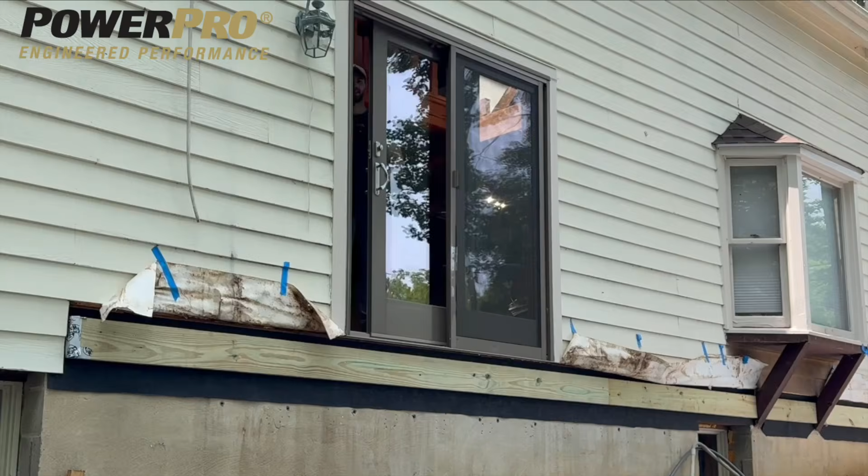In today's episode, we're gonna frame a deck.

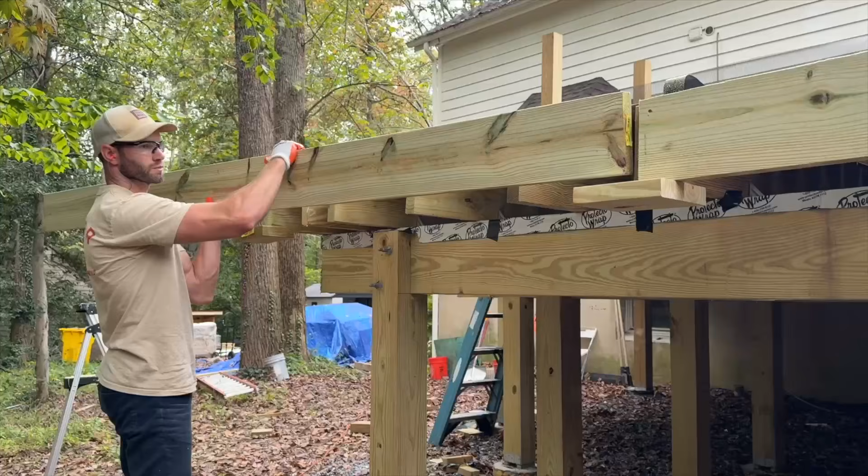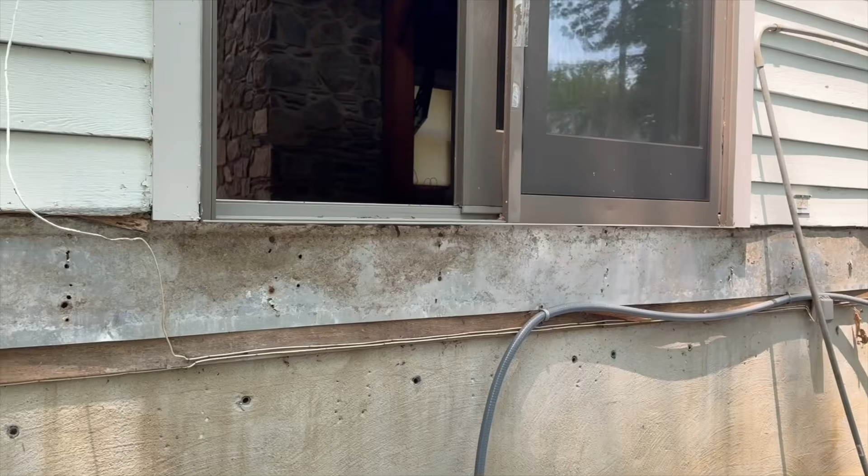Let's get this deck framing party started with the ledger board. The ledger board attaches to the house right here, and it's one of the most important parts of any deck. But if the ledger board is not flashed correctly, you can have a ton of rot and water damage, so I was pretty terrified to see what I would find behind this existing flashing.

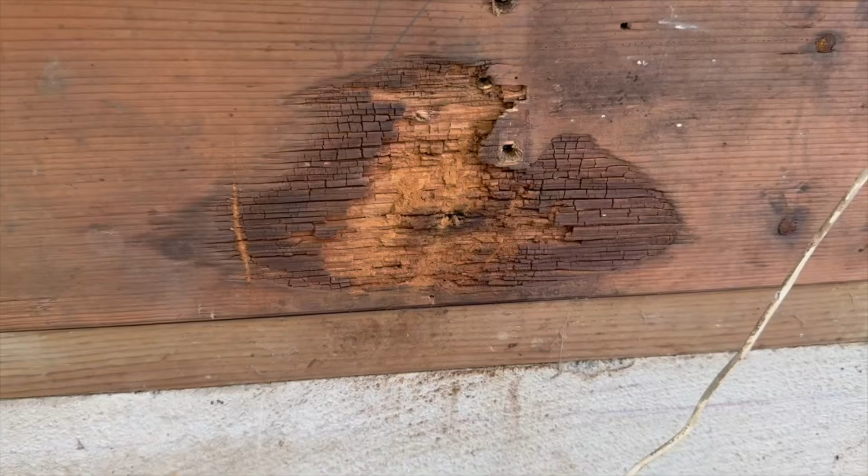So here's how we look with the existing flashing removed. Honestly, not too bad. There's a few areas like here and here with a little bit of rotting, but honestly, better than I expected. So the first step in getting a new ledger board mounted is I want to apply waterproofing to the rim joist on the house.

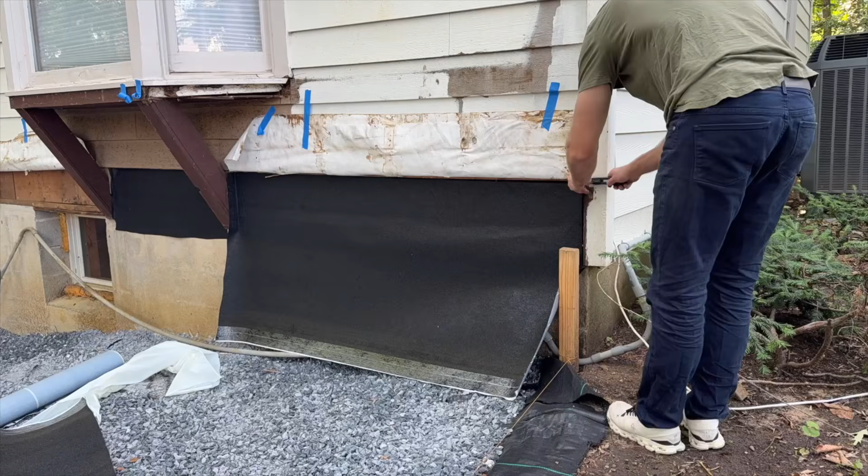I'm using a waterproof ice and water shield that I had left over from a previous project, but really any waterproof membrane will work. I like to leave the flashing long and then I'll come back later on and cut it with a utility knife. But you're gonna run this all along the rim joist and do everything you can to protect as much of your house as possible. And going back to that existing metal flashing, I wanna address a pet peeve of mine.

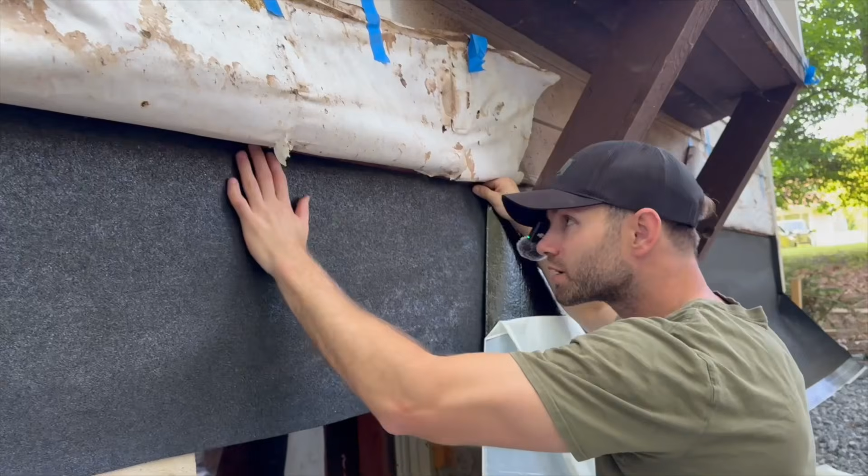I feel like everyone is very quick to judge the work that was done before them, saying it was wrong and it was improper, yada, yada, yada. You guys know the saying that yesterday's state of the art is today's butchery. So that flashing probably was exactly what people were doing at the time, and it seemed to work okay.

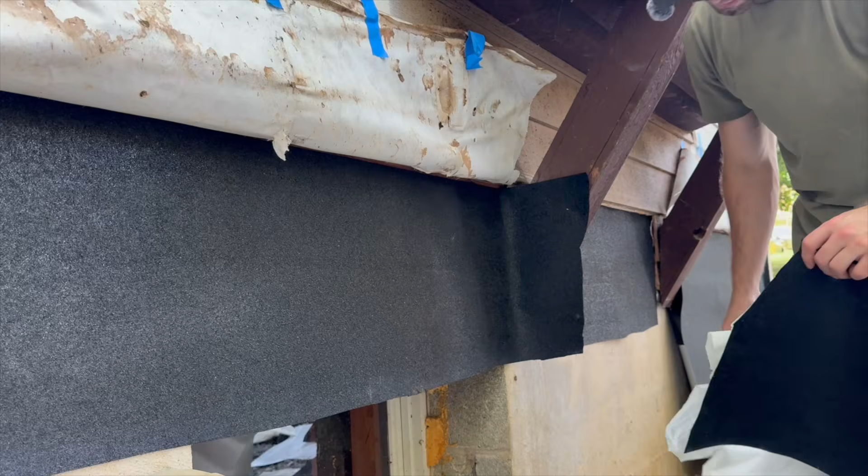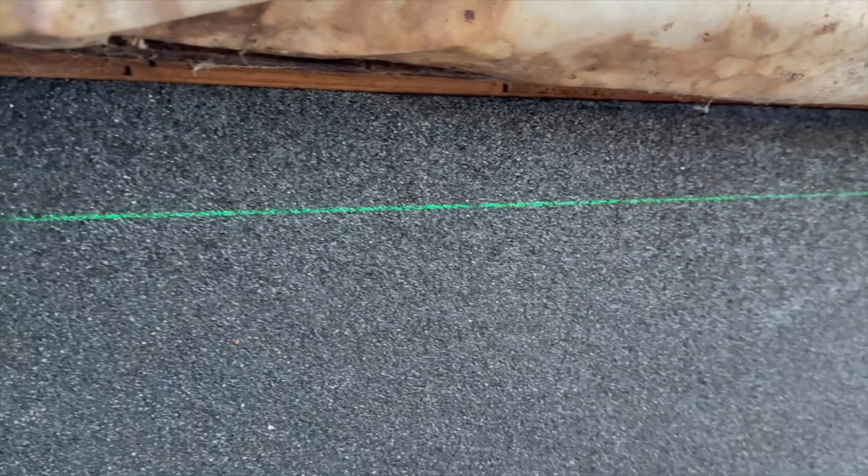To set the mounting height for my ledger board, I like to use a laser level to get that projection level across the flashing. I like to set my ledger board about 3 inches below the door threshold because I want to have 1 inch for the decking and then maybe 2 inches so water doesn't end up making its way into my house under a heavy rain. And you always want to snap a chalk line on top of the laser level because that laser level is going to run out of batteries or die or just be hard to see.

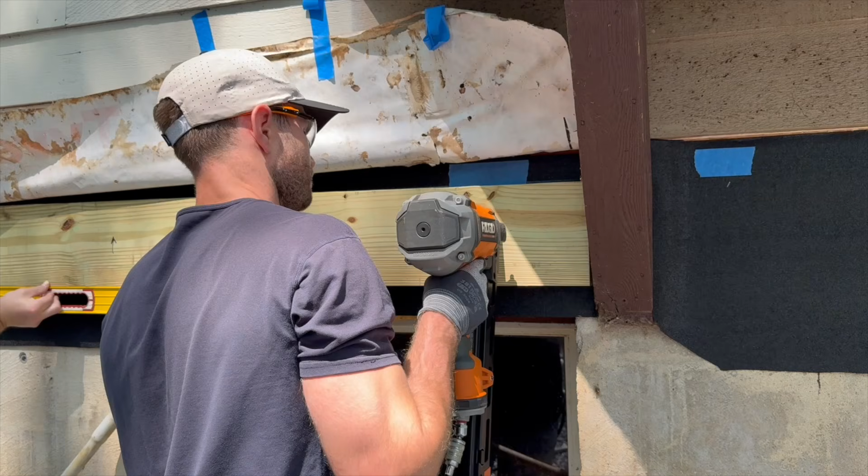Your ledger board is typically going to be a 2x8 or 2x10 piece of pressure treated lumber, and you want to make sure that you crown all of your lumber before you install it. I'll talk more about that later. I like to position the ledger board on my level line and then tack it in place with some 3-inch framing nails. Having a second set of hands really helps when setting your ledger board, and don't worry, we're going to go back with some heavy duty fasteners later on. These nails are just to hold it in place temporarily.

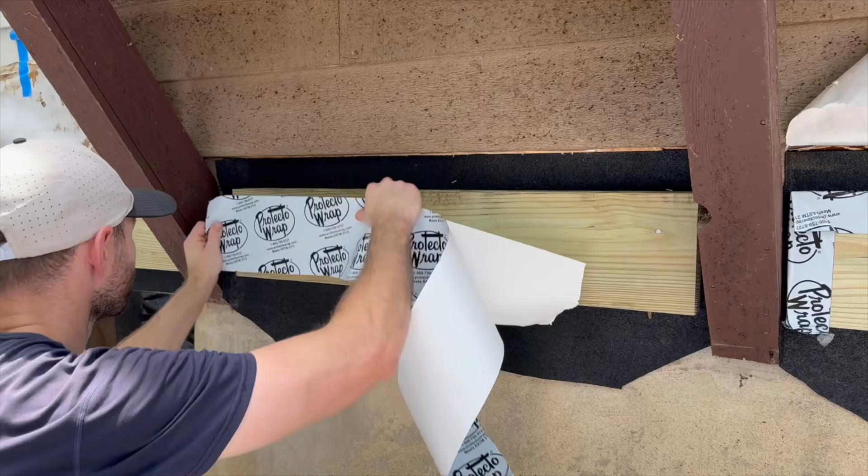And I feel like everybody sets their ledger board a little bit different. This is just how I do it. And speaking of which, I apply a piece of 6-inch flashing on top of the ledger board just like this. My idea is that we're not going to have water getting behind the ledger board if we install this flashing now.

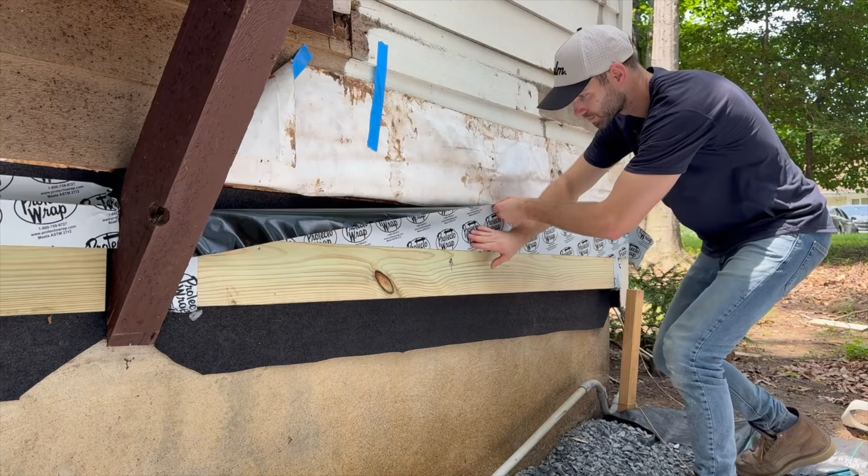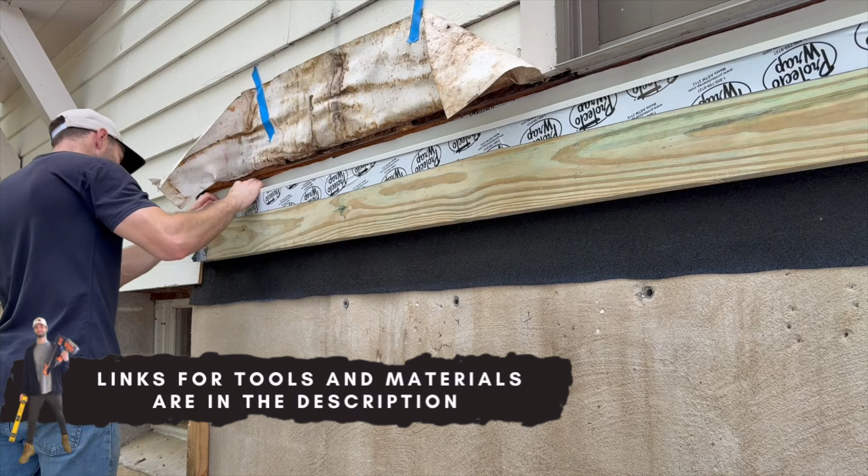Now, some people will argue that this is incredibly redundant because I'm going to go back after applying this flashing and I'm going to install a piece of metal or vinyl ledger flashing right on top of it. So some would argue this is unnecessary, but this is kind of the belt and suspenders approach that I've used for the past decks I've built. So let me know if you think this is overkill or what you do for your deck. I don't know, I just feel like I'd rather be safe than sorry. I like to nail either the metal or the vinyl flashing to the house every 18 to 24 inches or so.

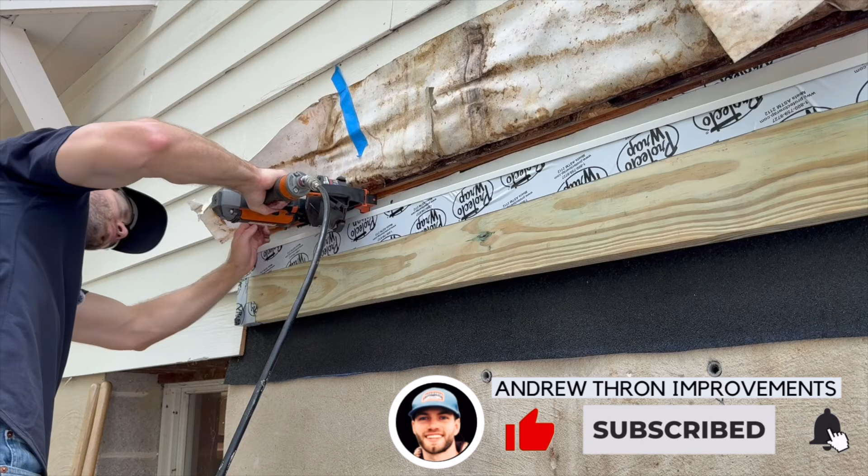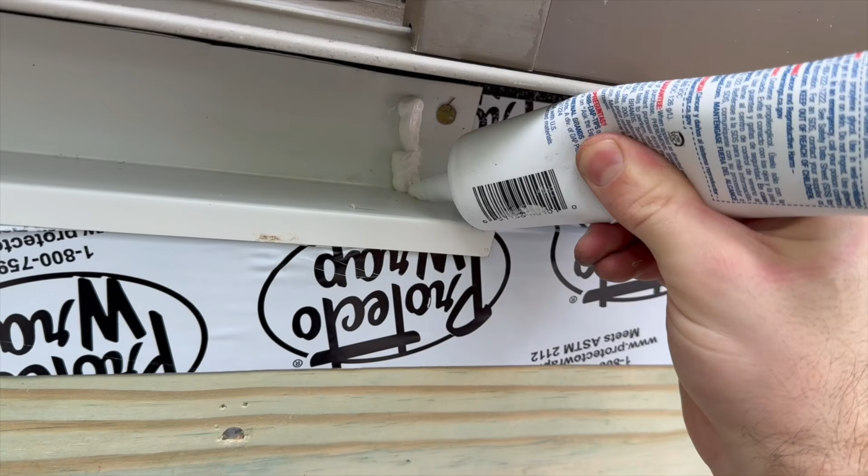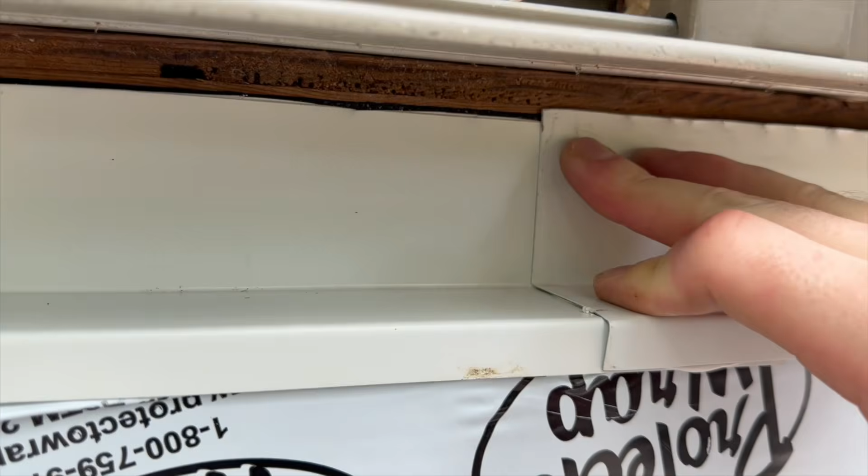And I wish I had vinyl flashing, but they only had metal available at my local hardware store. And if your deck is going to be longer than 8 feet, chances are you're going to have to overlap some of your ledger flashing. And for this, you want to apply some caulk to one end and then overlap it by about 4 inches. The logic here is that if any water makes its way on that ledger flashing, it won't be able to go underneath because of the caulking you put in place. And don't forget to nail the overlap. I'm using a roofing nailer for this, but a hammer and a nail will work just fine.

And if you find yourself thinking, wow, must be nice to have a roofing nailer or all these tools, just know that they all have a story and a terrible project behind them because roofing is not fun, especially in 90-degree heat.

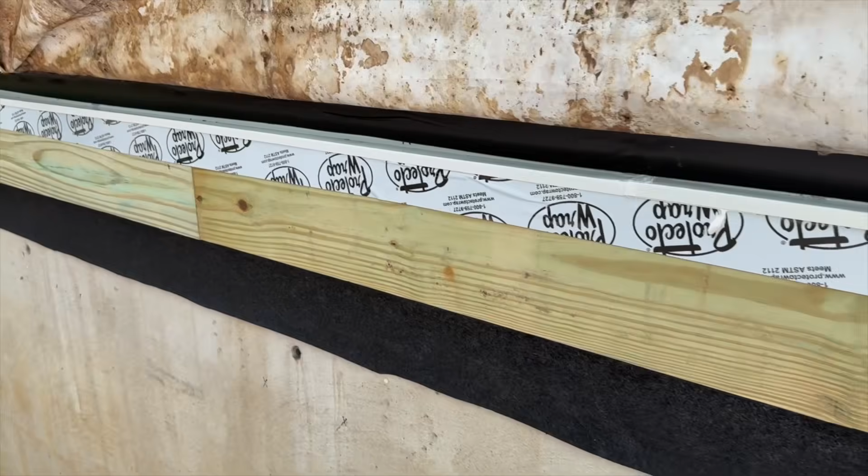I use tin snips to make any cuts or adjustments to this metal flashing. Again, I would go with vinyl if you can find it, and that way you can just use a utility knife or some regular scissors to cut it, but it's really not too bad either way. And you might be thinking, oh no, now you got the nail holes for water penetration. Well, here comes the last layer of waterproofing, which is a piece of joist tape that goes on top of all those nails. So at this point, if you're keeping track, we have the belt, the suspenders, and a couple safety pins. Our pants are not falling, and hopefully our deck is not rotting.

Now, to actually secure that ledger board to the house permanently, I'm using some LedgerTite Screws 3 5/8 by Power Pro, and I'm going to put these every 12 inches or so. The actual requirements for your ledger screws in terms of size and spacing is in your building code, so make sure you consult that. And these LedgerTite structural screws require no pre-drilling, and they install 30% faster than many of the other screws on the market.

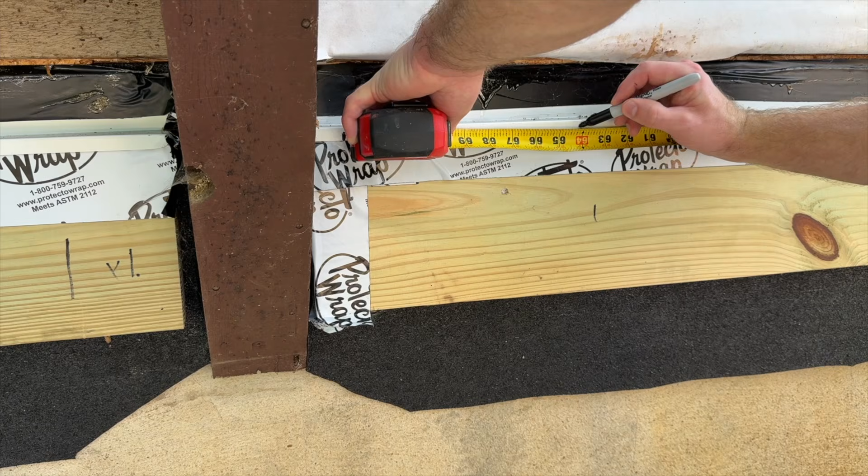And the last thing you want is for one of your ledger screws to get in the way of your joist. So it's a great idea to mark your either 16-inch or 12-inch on center joist spacing before you put these screws in to ensure that you don't have a conflict. I'm doing 16-inch on-center joist spacing, which we'll talk about later, so I just did 2 screws between each joist bay. And I like to stagger them one high, one low. One thing I do want to mention is that some people are getting away from ledger boards and instead they're installing a second beam right up next to the house, but we're going with the old school ledger board for this deck. With the ledger board installed, let's talk about the posts and beams.

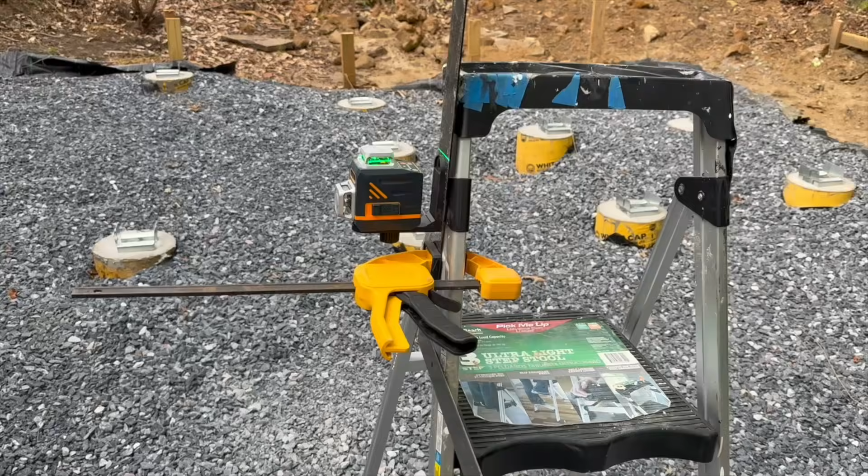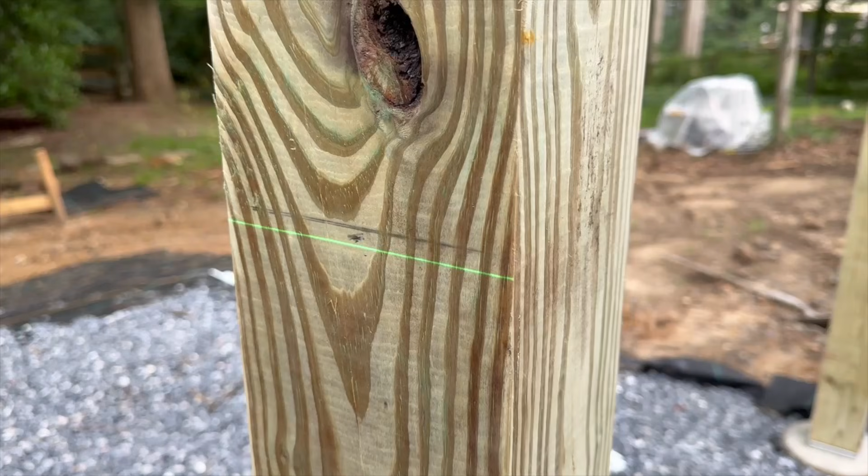In order to get the height for the posts, I like to use a laser level to project a line along the bottom of the ledger board here. Since we're using 2x8 joists, the bottom of the joist will be at the bottom of the ledger board. To mark the cut line on the 6x6 we're using for posts, I stand them up in the post hardware and then I mark the laser line where it intersects with that post. Make sure that your post is all the way at the bottom of the hardware and that you use a post level to make sure that it's perfectly plumb before you make your mark.

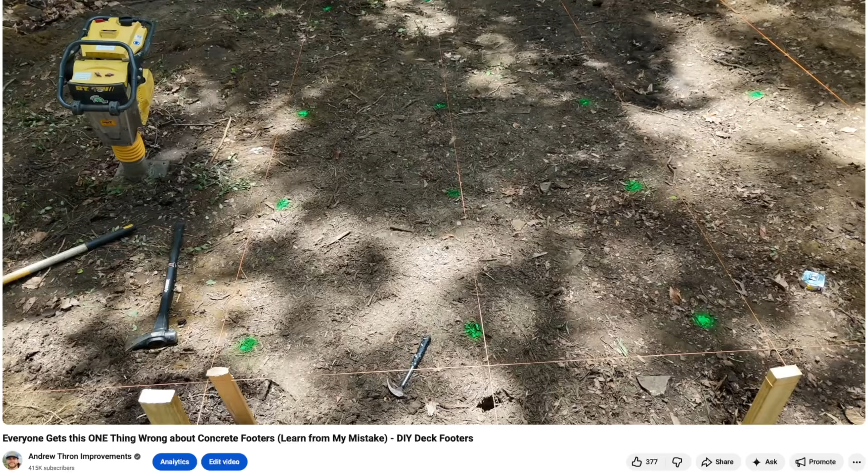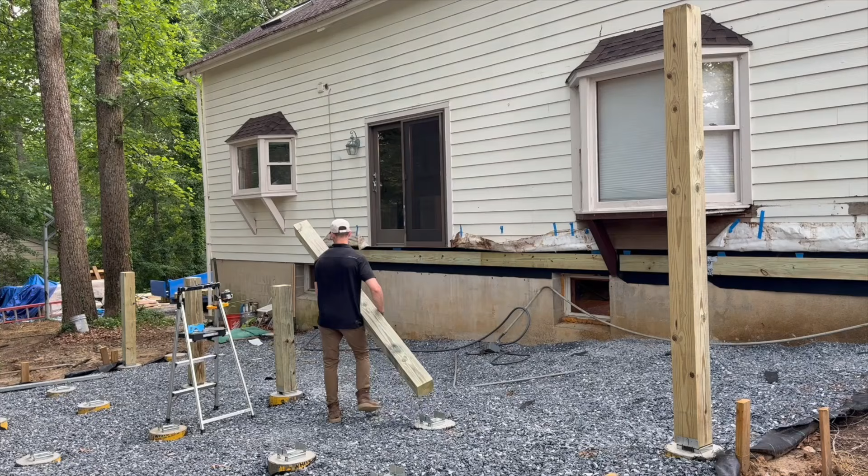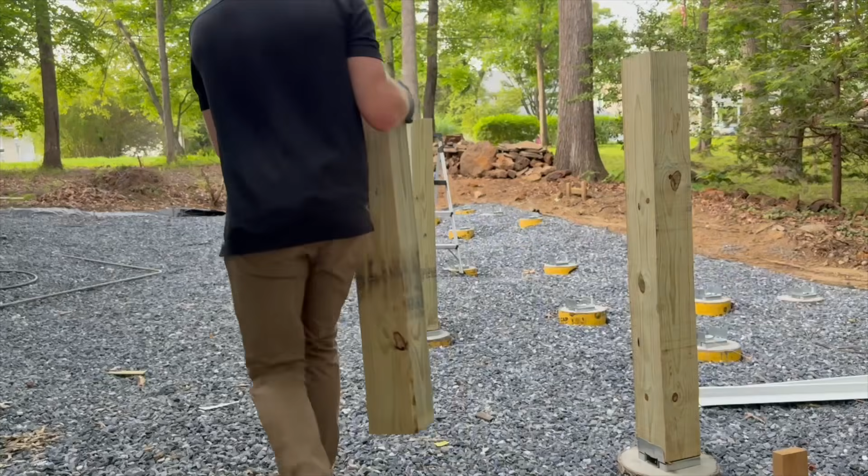Using the 10-foot long 6x6s was a little bit unruly, so feel free to trim them down a little bit before you put them in the hardware, but I just kept them long and muscled my way through it. To cut the 6x6s, I just used a miter saw, and the annoying thing about a 6x6 is usually you're gonna have to cut one side and then flip it over and cut the other. A little bit annoying, but you'll get through it. And for my last deck, I used 4x4 posts. I just felt like for this deck and what it's gonna be supporting, a 6x6 was the right call.

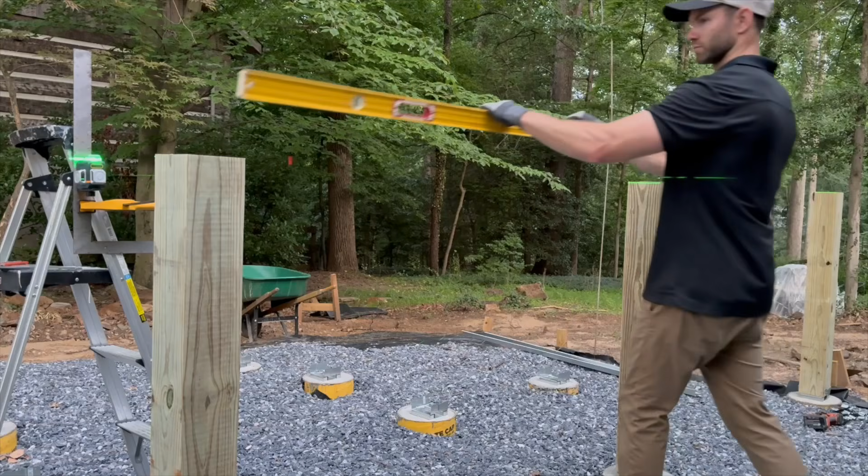So a little bit heavier, a little bit more expensive, but I think I'll sleep better at night. And if you're paranoid that your laser level is not calibrated or something, you can double check everything with a 6-foot level, but you should be in good shape.

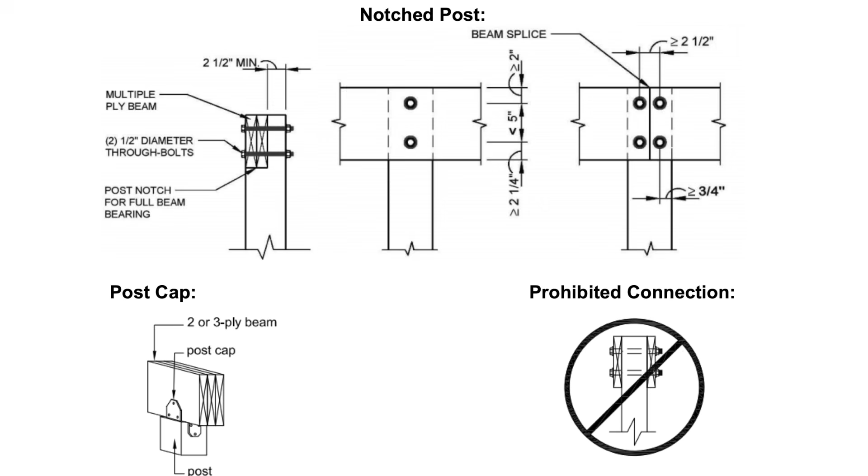When it comes to installing the beam, code prohibits any kind of side mounting to the post. I've seen plenty of decks with this type of beam and it puts all of the stress on the hardware and none on the post. No bueno. Option number 2 is to mount the beams directly on top of the post with a piece of hardware. But I think we can do better with the third option, which is to notch the post. I have a 2x10 beam, so we're gonna cut the notch for that right now.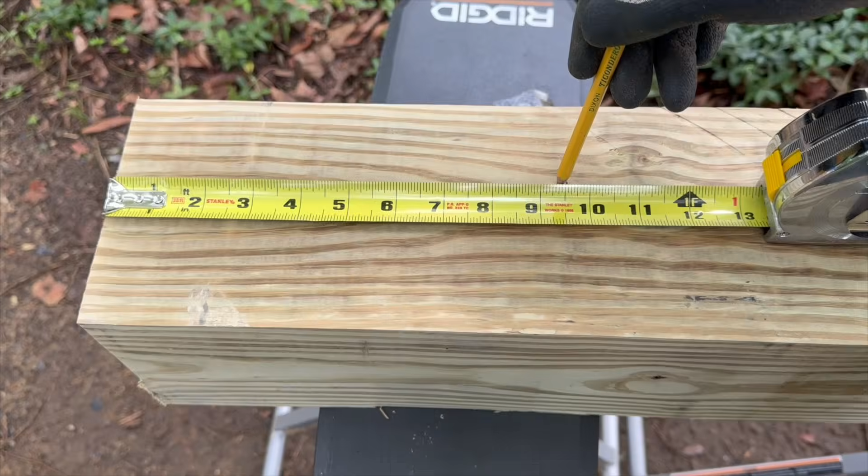Now, when it comes to notching your posts, you first wanna get your beam width. This is about 9.5 inches, but this can vary between a 1/4 inch to a 1/2 inch between boards. So you definitely wanna know the width of the beam you're gonna be installing on the post. So we got 9.5 here, and then we're gonna take that 9.5 and mark it on the post. So 9.5, we'll go ahead and mark it right here. Okay, then we're just gonna rotate this and mark it on the sides as well.

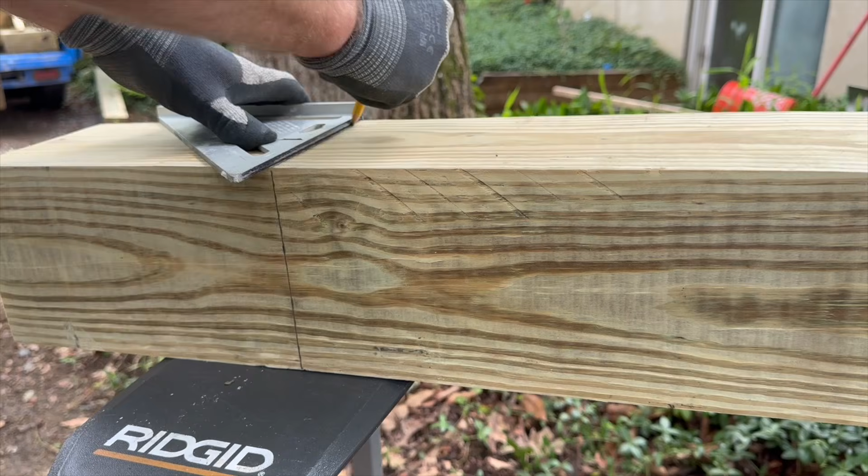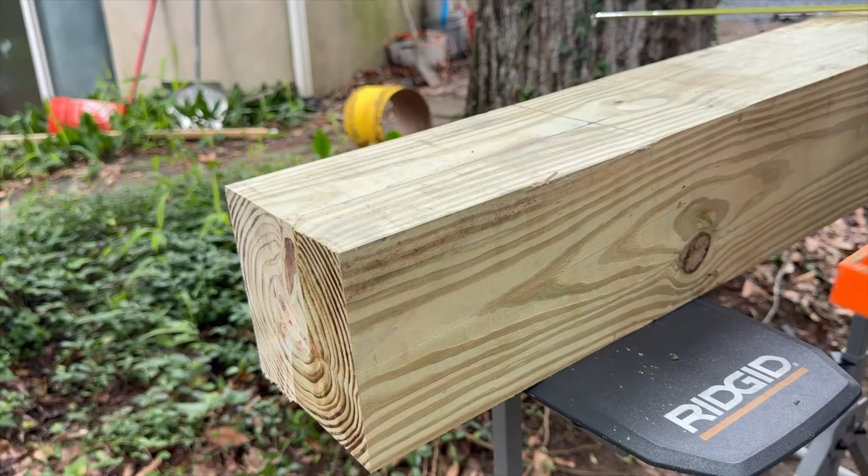Each 2x10 should be 1 1/2 inch, so your beam really should be 3 inches, but I'm gonna go 3 1/4 to make sure that we're fully nested. We'll mark 3 1/4 right here, and then we'll also mark it at the top right here. Okay, we'll go ahead and mark that, and then we'll flip it over and do it on the other side as well.

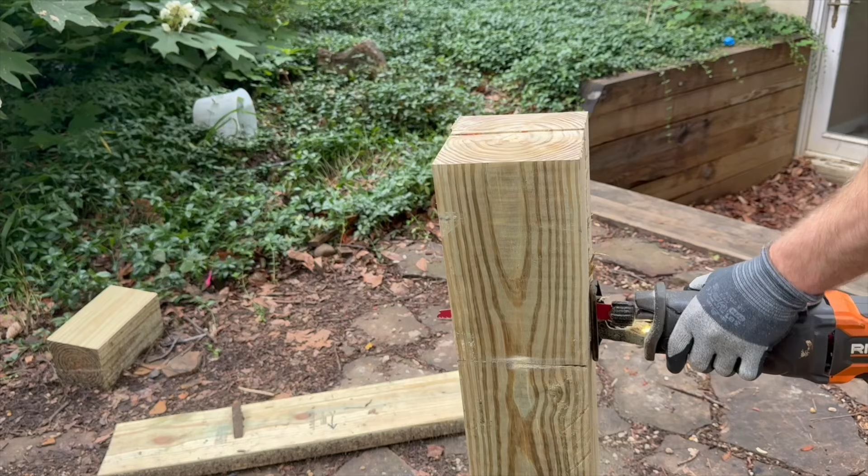And once we have the notches marked, we're gonna go ahead and cut it with a circular saw. And we'll just keep rotating it through. And again, the annoying thing about a 6x6 is you'll probably have to use a recip saw or something to get all the way through the deep cuts, but you'll get through it eventually. And I want to make sure that the post is not sticking up past the beam, so I cut around a 1/2 inch off right there. Then I grabbed all my posts and positioned them in place.

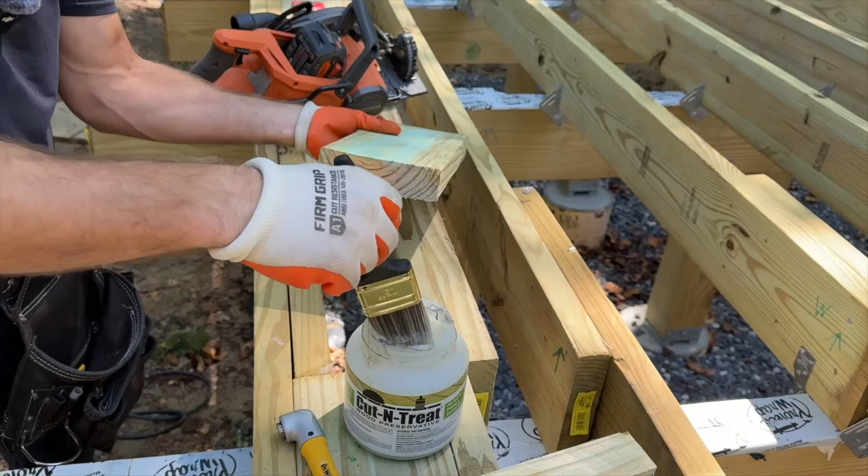And whenever you cut pressure treated lumber, you want to go ahead and retreat the cut ends. I'll link this product down below, but this is going to help the deck to last as long as possible.

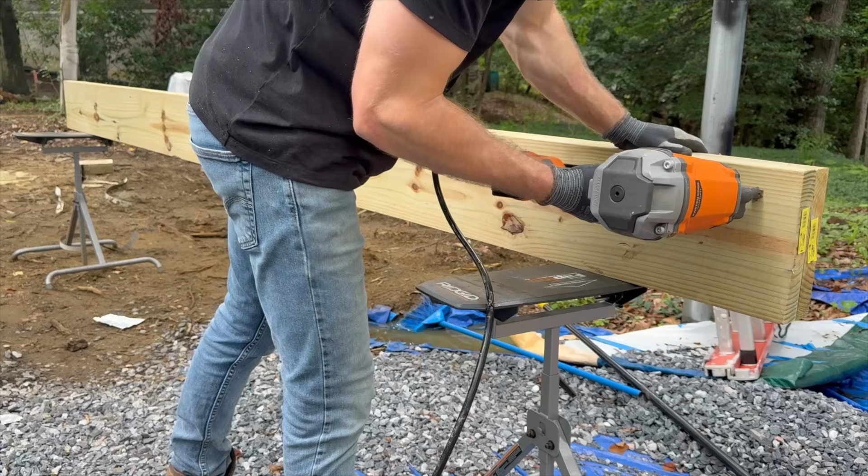With the posts ready, I made sure that my beams were perfectly in line before nailing them together with a few 3-inch framing nails. I'll screw the beams together later, but that's good enough to get it over to the posts. And I don't know if you guys have ever lifted up a 2x10x16 soaking wet piece of pressure treated lumber, but the beam, believe it or not, is twice as heavy as one of those. So a little bit brutal, but I was able to get it up there.

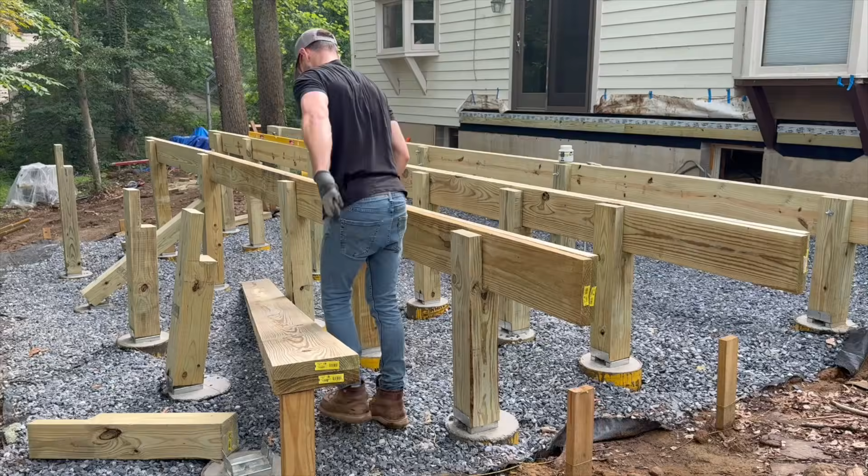And a lot of these DIY YouTubers want you to believe that everything always goes according to plan and that it's all sunshine and rainbows. Well, have you ever been dead-legged by a 60-pound 2x10 double beam? Yeah, me neither. What a weird question. And it's funny because right before this fell, I remember thinking, wow, I really can't believe that this has gone so smoothly and nothing's fallen over yet. So I might have mind manifested that one, but eventually we got everything in place.

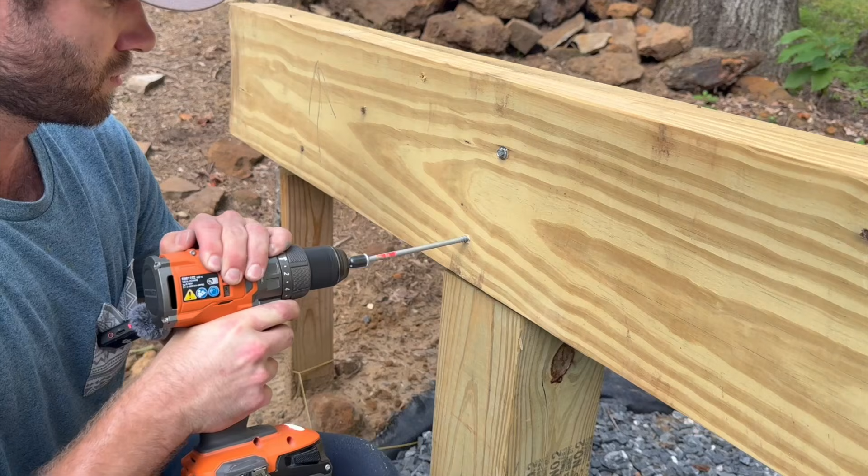When it comes to attaching the beams to the post, the old school method is to drill a 5/8 inch hole through and then use a 1/2 inch through bolt with a washer and a nut on the end before tightening everything up. But nowadays, most people are using these ThruLOK lag screws, which require no pre-drilling, and they replace that 1/2 inch carriage bolt. So it's a little bit faster to go all the way through.

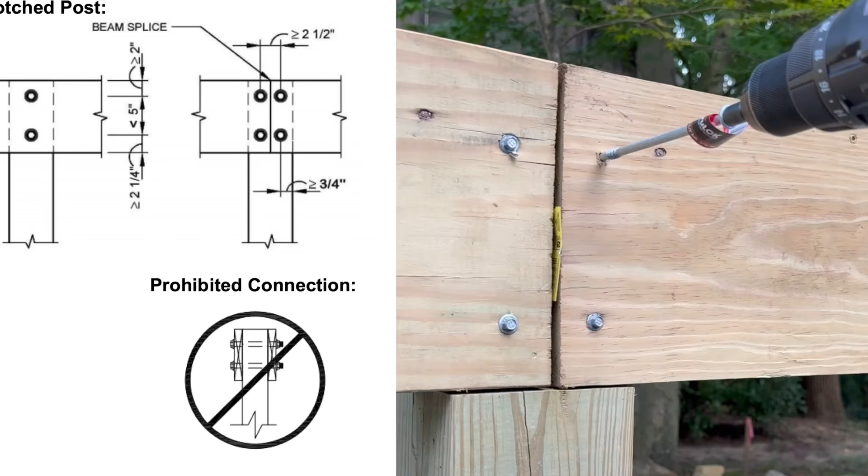These bolts are a little bit more expensive, but you're just gonna go ahead and drill through, put on the washer, thread on the nut head right there, and then just tighten it up a little bit more from the screw side. You're gonna need 2 of these ThruLOK bolts per post beam connection, unless your beam has a splice at that post, in which case you need 4.

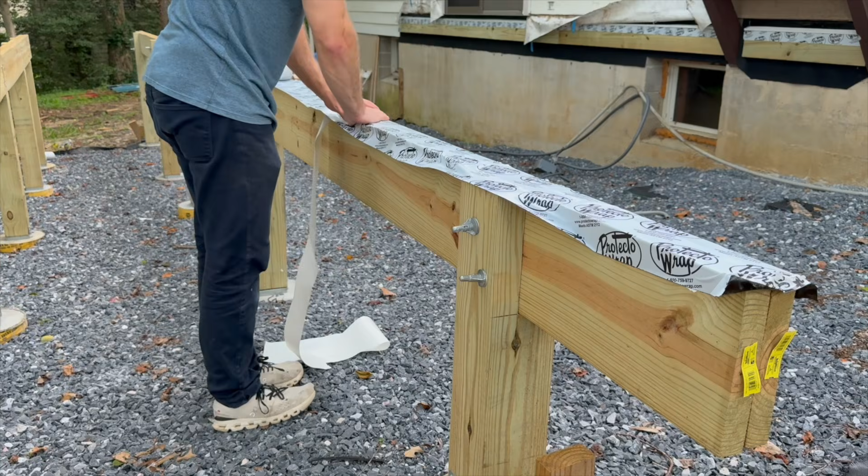And you want to make sure that all of your posts are perfectly plumb, so confirm that with a post level before you attach them to the beam. And the last step for this part of the project is to waterproof the beam. The last thing you want is water collecting in between those 2 beam boards, causing it to rot out prematurely. Putting this 6-inch piece of flashing over that beam is going to prevent water from getting in between them and help your deck to last as long as possible.

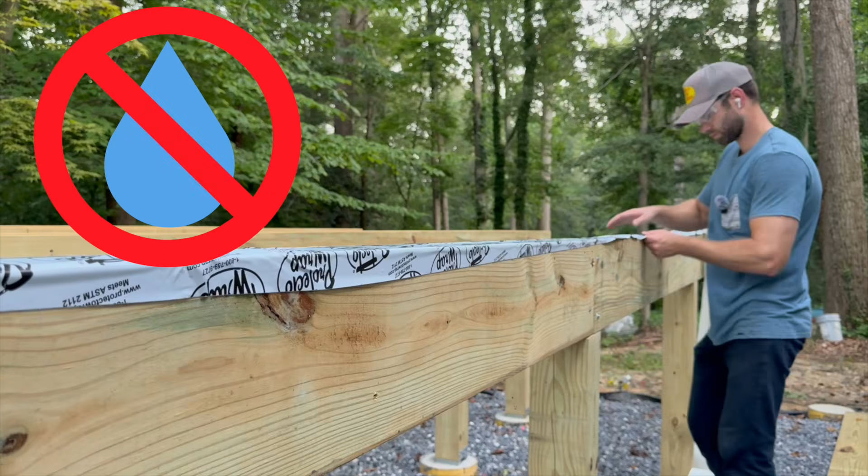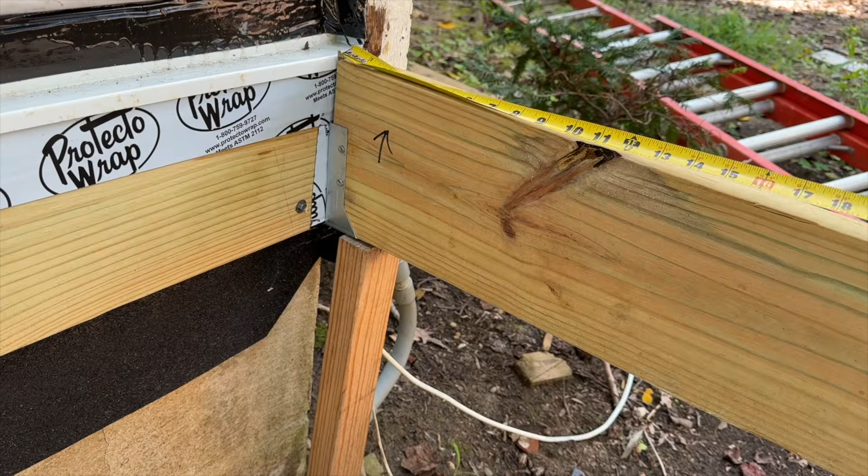With the beams installed, it's time to talk about the joists. For the outermost joist, I'm using a concealed joist hanger, and I was told that this is the right size for a 2x8, but I guess it's the same for a 2x6. You need to make sure that your outermost joist is perfectly perpendicular to the ledger board, i.e. square, and that's important because we're going to pull all our measurements from this outermost joist.

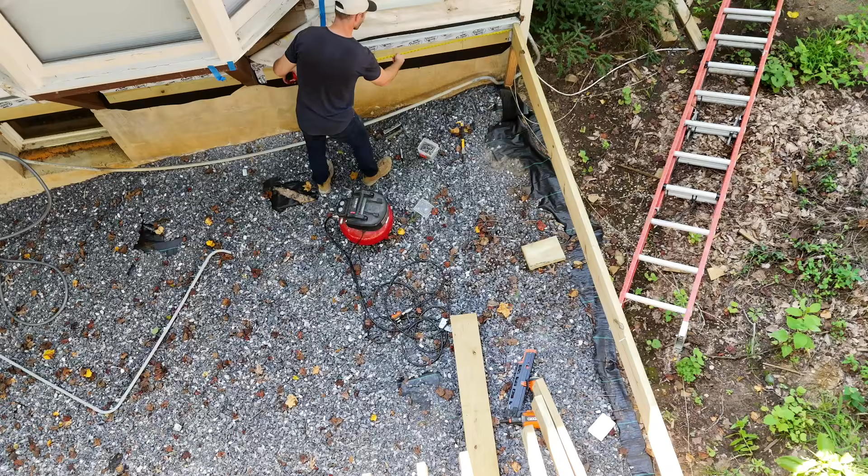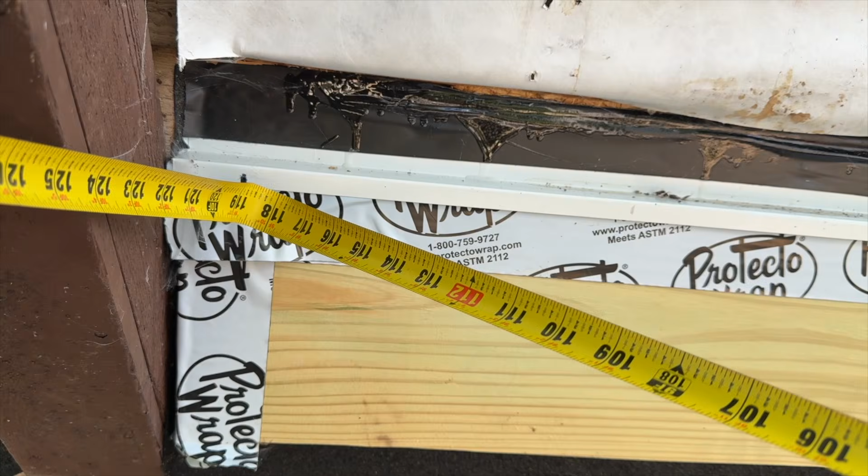And to confirm square, I'm using the Pythagorean theorem, the 3-4-5 method, but any right triangle like a 6-8-10 will also give you a more accurate measurement. Once you have the 6-foot leg and the 8-foot leg of the triangle marked, you're just going to pivot that outermost joist until the hypotenuse is exactly 10 feet. Check out my deck planning video for more info on this, but I don't really care how you get there, just make sure you're square.

After confirming square, I attach the joist to the beam using one of these rafter ties. I only used a rafter tie for the outermost joist because I didn't want to be able to see the hardware from the outside. With the outermost joist installed and square, it's time to install the rest of the joists. If you didn't mark your joist locations as part of the ledger board installation, go ahead and do that now. 16-inch on-center joist spacing is by far the most common, but some people will install 12-inch on-center joists if they're installing a certain type of decking or if they're doing a different orientation for the decking boards.

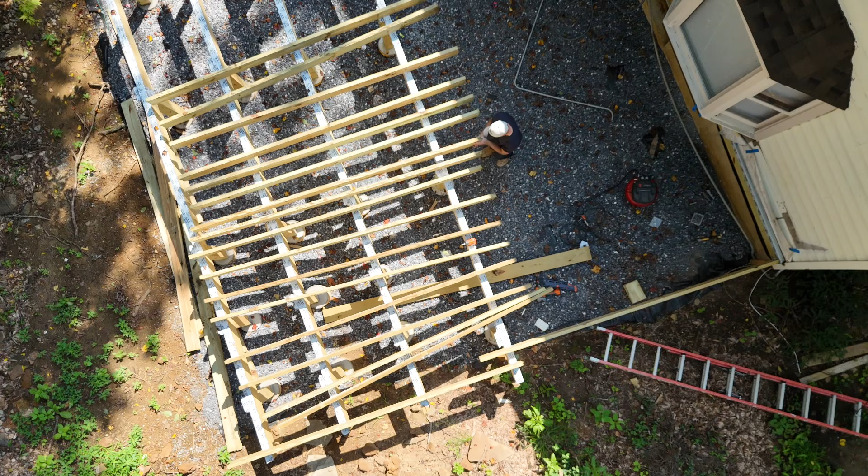And before you even think about hanging your first joist, you want to make sure that you crown every single joist. The crown is a slight upward arching curvature that you'll see when you look down a board's longest edge. Crown up for all joists. I eventually figured out the fastest and best way to install joists, but I first had to fumble through some bad attempts like this one, where I tried to use the tab and then hold the joist and the joist hanger at the same time. It was not easy. All right, after doing about 15 of these, I think I finally got the system.

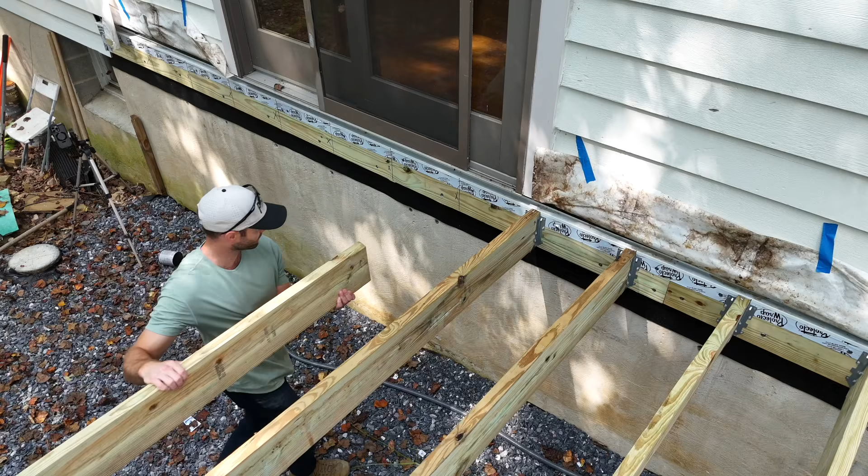I found that positioning the top of the joist even with the top of the ledger board and then nailing it in from the top with a framing nailer was a great way to tack it in temporarily, where I could adjust it, make sure it was right on line with my mark, and then attach the joist hardware later. Also, these Simpson joist hangers have requirements for all the hardware you need to use. I'll link it all down below. But I really think this is the secret sauce.

You're just going to mark your joist location, position the joist so it's right on your marked line, use that framing nailer to tack it in place so it's right flush with the top of the ledger board, and then hands-free, baby. It's just hanging exactly where it needs to be. You can take your time installing that joist hanger. And I actually installed 4 nails and then 2 screws to attach the joist hanger to the ledger board. I don't know why, but I just decided to mix and match the screws and nails, and then obviously you're going to use the longer screws to go through the side compartments there, through the joist and into the ledger board.

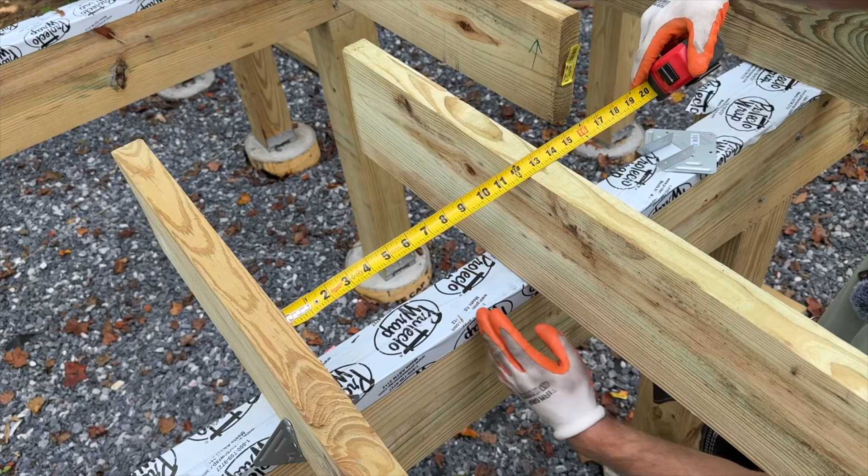Just make sure that you go back and make sure that nail that you put in to hold it in place isn't sticking up past the top of the joist. And again, you really should mark the joist location on the beam. I forgot to do this, so I just had to do a 16-inch on-center offset from the previously installed joist. This was very inefficient. You should 100% mark your beam at the same time you mark your ledger so that all of your joist spacing is coordinated.

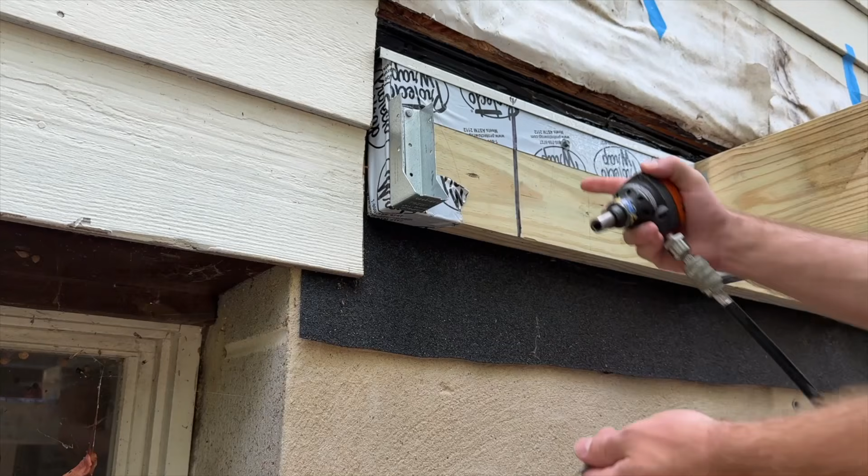And I'm installing hurricane ties at all of these joist beam connections. When we get to the end of the ledger board, I'm gonna do a concealed joist hanger, just like we did for the outermost joist on the other side. So then we're gonna take our last joist and slip it in. And if you're wondering where that extra joist came from, stay tuned, I'll explain that in a little while.

Also, I installed these super tall 6x6s for something that I'm pretty excited about in the future, but another little teaser, hopefully this ends up turning out pretty well.

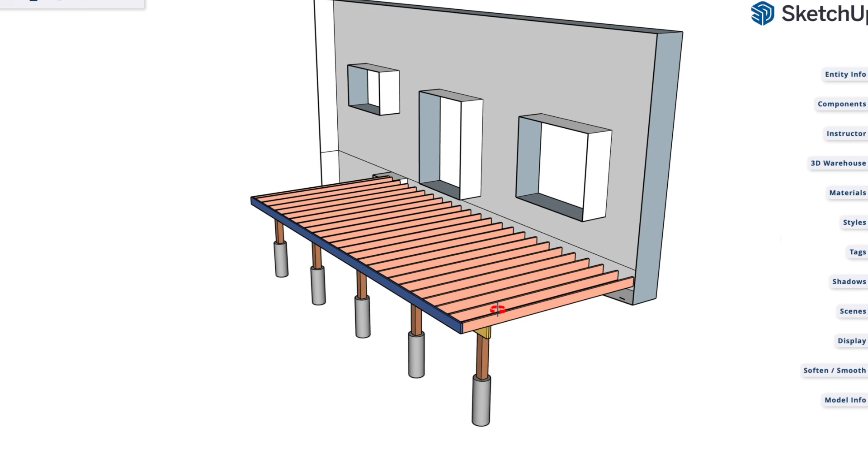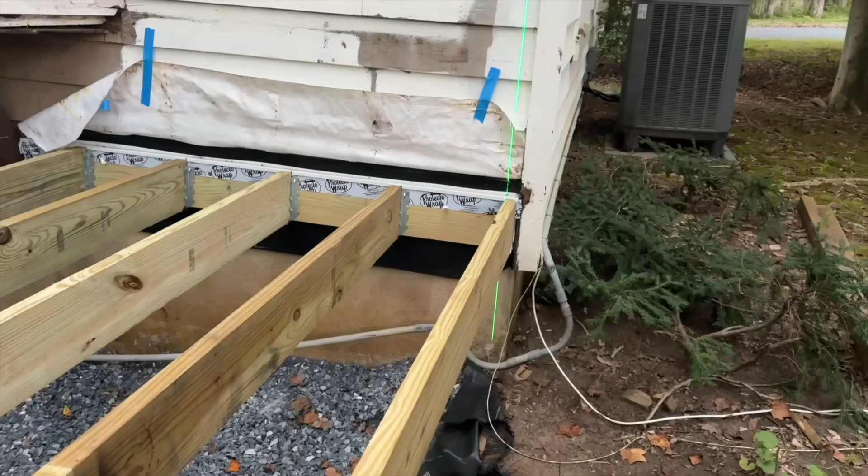Yikes. Now, 95% of decks are just gonna have one beam, but if you have a massive deck like I do and you have a multiple beam, multiple joist situation, here's how I did it. I staggered the joists so I could attach one joist to the other joist. Here it's on the inside, and to get my outermost joist, I just mounted another 2x8 to the outside of it using a laser level to make sure I was perfectly square.

For the joists that are going to be sistered together, make sure you pick joists that are similar in size so that one's not sticking up past the other, and I used a couple framing nails to attach them to each other, and I also attached a joist hanger, but personally I think this was completely unnecessary. Then I just made sure that I was maintaining the proper joist spacing and offsets before securing the joists to the remaining beams using a bunch of hurricane ties.

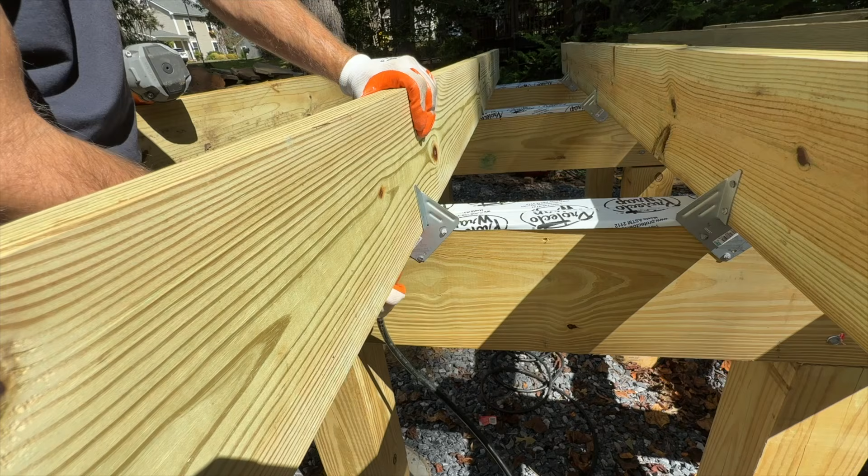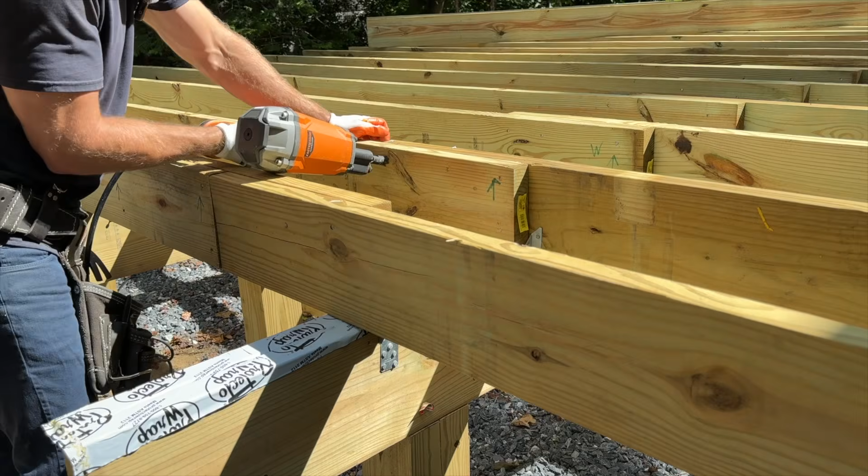Now, I will be the first person to admit that this deck is probably completely overbuilt. I am hopefully going to be installing a hot tub towards the back of the deck right here, which is why I have so many beams, but even with a hot tub, this is probably overkill. And don't get me wrong, I would prefer to overbuild a deck than underbuild it any day of the week, but it is a lot of extra cost and materials, and it takes a lot of time because now I'm installing 3 times as many hurricane ties, and honestly, those took the longest.

The last step is to install the rim joist on the end of our other joists, but I like to put the decking boards on first. Let me explain. I like to leave my joists long until I get to the very last row. So this board right here is going to be my last row of boards, and then I'm going to have one more board that goes on the end, which is going to complete my picture frame. So I'm going to position this board in place, and I'm going to mark all of the joists so I know where this is going to end.

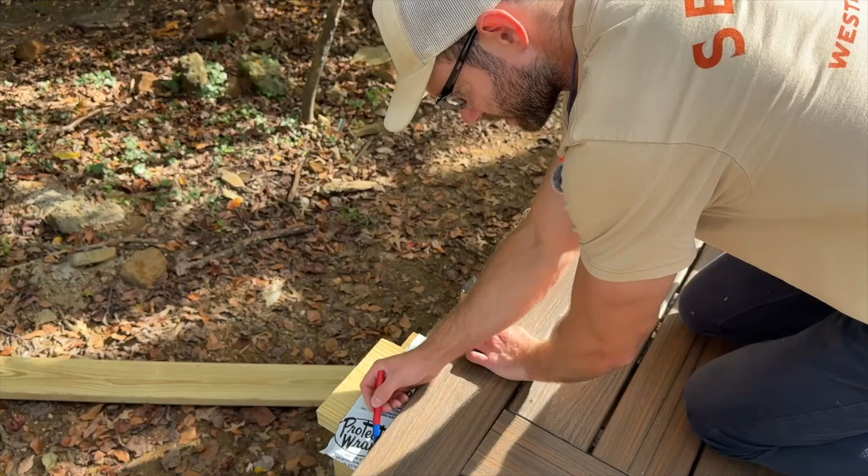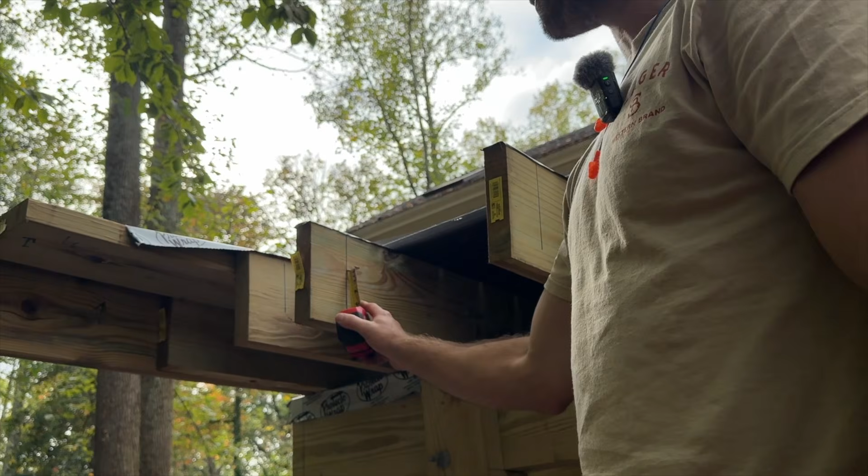So obviously I'm fast forwarding here to where I already installed the decking boards, but I want to mark both on the top and the sides of the joists where that last composite board is going to be. Okay, so this is the mark for the end of our last board. And because we have to attach the rim joist and I also want a 1-inch overhang, I created this jig here, which is 2.5 inches. So I'm going to position that on my initial mark right here, and then I'm going to mark the inside, and that way I know where to cut to get us exactly where we need to be.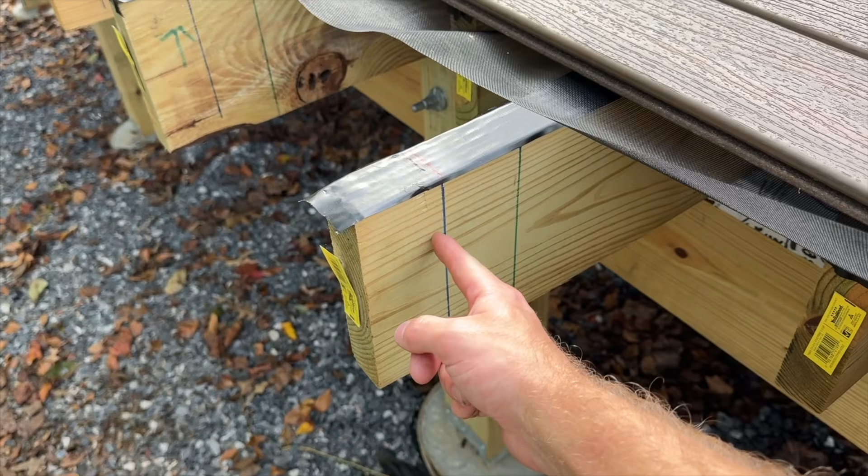So this was the mark for the end of the board. This is where we're going to cut because we're going to have a 1.5 inch rim joist, and then I want to have a 1-inch overhang with the board over the edge of the deck. To make all these cuts, I'm using a circular saw, and I like to cut from up above. That way you're not really dealing with the dust in your face.

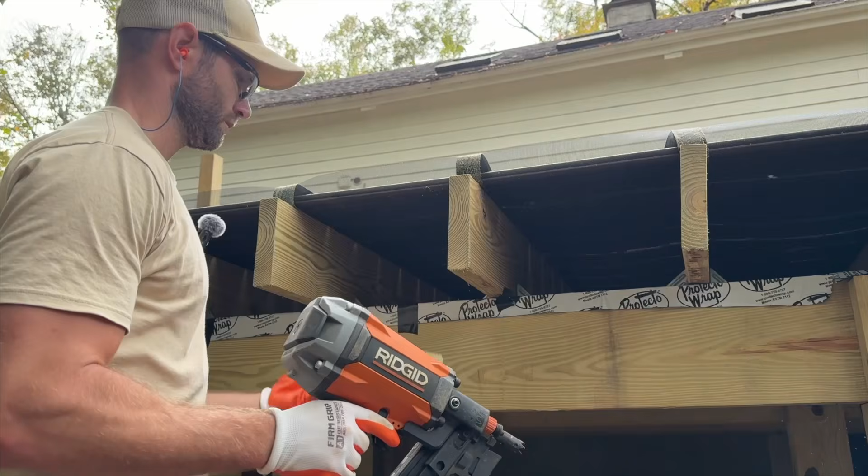With all of the joists cut to size, it's time to install the rim joist, and I like to hang up a little piece of blocking that I can use as a second set of hands to hold the rim joist in place so I can nail it to the end of the joist. And you may need to install a piece of blocking if you're going to have 2 pieces of rim joist that come together.

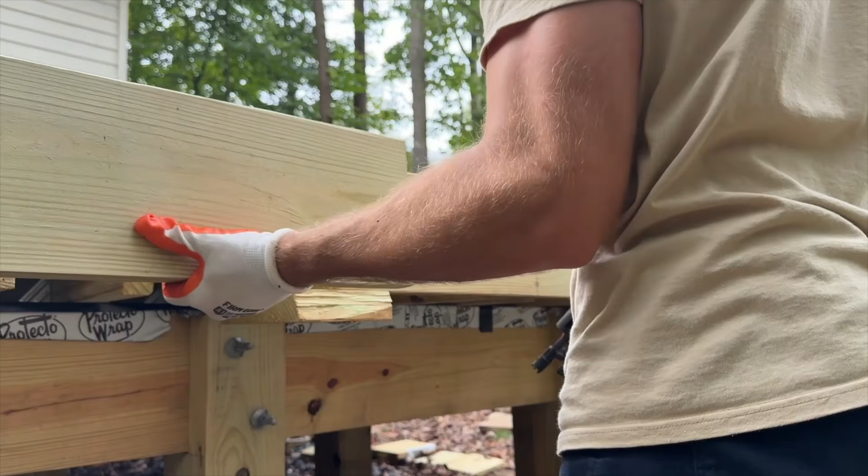And as with the rest of the deck, make sure that you're crowning all of your lumber and that you're treating all of your cut edges. And installing the rim joist is one of the more exciting parts of the project because you're basically at the home stretch. You can kind of get an idea of what the deck's going to look like, and I also recommend that you go back and put in a few screws.

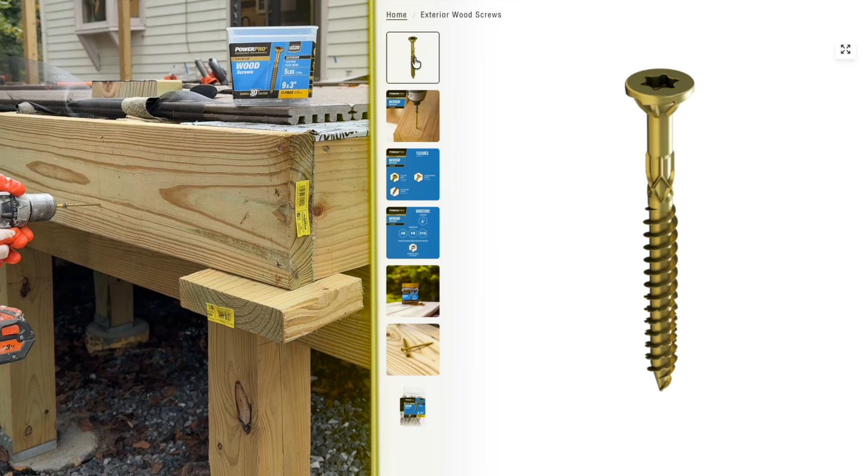I recommend that you keep some 3-inch exterior rated Power Pro screws on hand for any deck project, since you're going to need them for things like the rim joist like I'm installing here, but also for the blocking and a bunch of other locations.

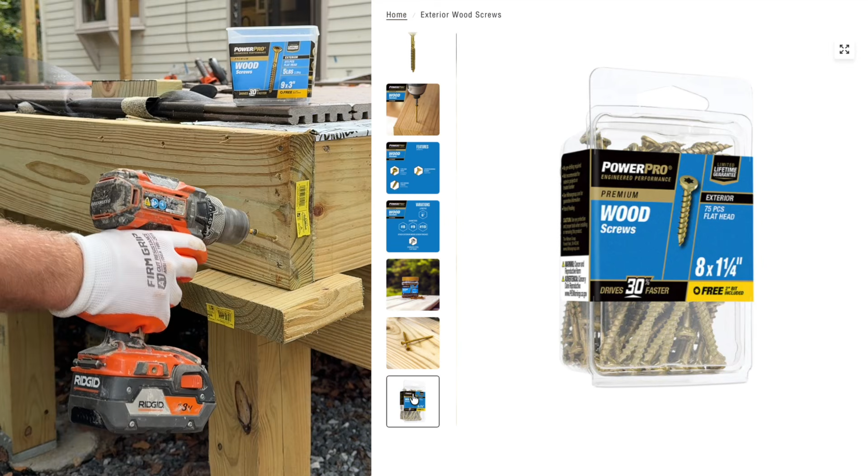And finally, it's time to talk about the blocking and waterproofing, as well as a few finishing touches. First, if you left any of your beams or your joists long, go back now and cut them off to size. And if your joist span is longer than 8 feet, it's recommended that you put in some blocking at the midpoint of your joist span to keep the joists from twisting, and also so the deck functions as one complete unit. I like to stagger the blocking to make it easy to nail, but you can also toenail it in from the side.

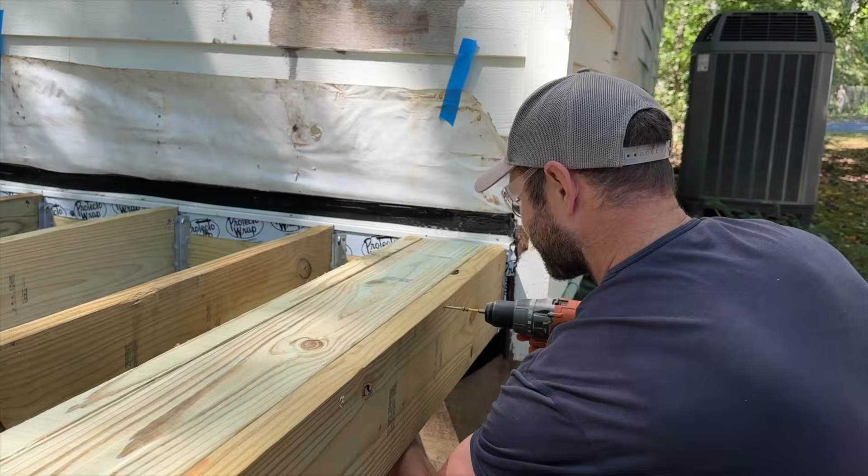And if you're going to be installing a railing, you might want to consider installing a piece of horizontal blocking so that when you install your railing posts, you have plenty of wood and meat for the screws to grab into. For my previous decks, I skipped this step, and as a result, I had to install some supplemental blocking from underneath the deck to position it directly below the railing posts. This was fine, it was just kind of a pain in the butt, so I figured, why not install some horizontal blocking for this deck and see if it's my new go-to going forward.

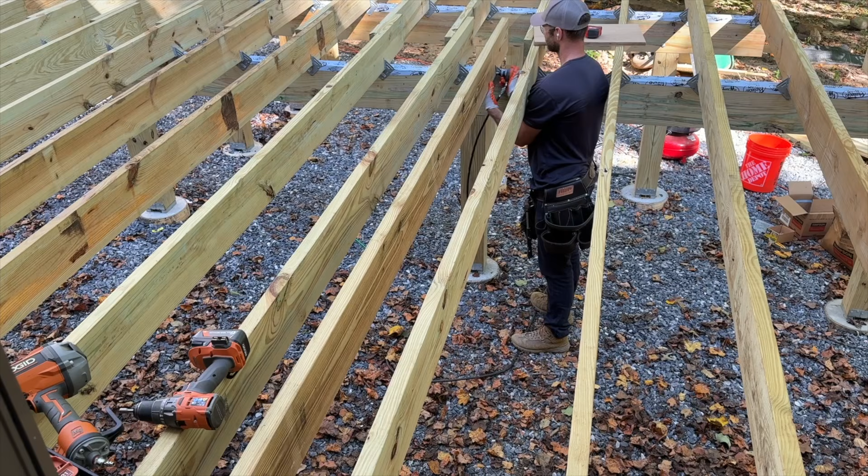And if your deck is going to be longer than 20 feet, you might want to consider installing a breaker board so that you don't have a butt joint where your 2 boards come together. We're going to talk more about the breaker board in next week's composite decking video, but you want to make sure that you put in provisions to support it during the framing stage. Here's a look at the deck with all of the blocking and breaker board supports in. Now let's make our deck last forever.

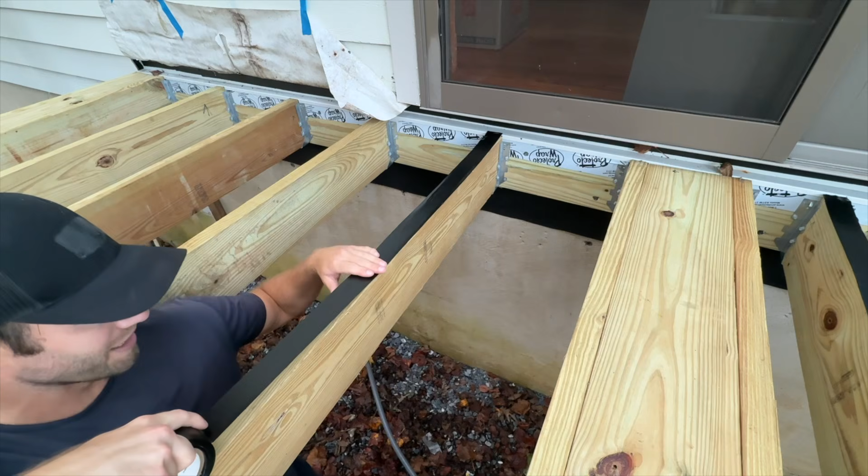And before I completely finish up with the framing, I'm going to install some joist tape on each one of the joists. The idea of joist tape is that it's going to help to waterproof all the joists and help them to last almost as long as the composite decking that we're going to install next. If I recall correctly, I think pressure treated lumber lasts for like 20 or 25 years, and most composite decking has a warranty for like 35 years. So if this tape gives me an extra 10 years, I'll be pretty happy with that.

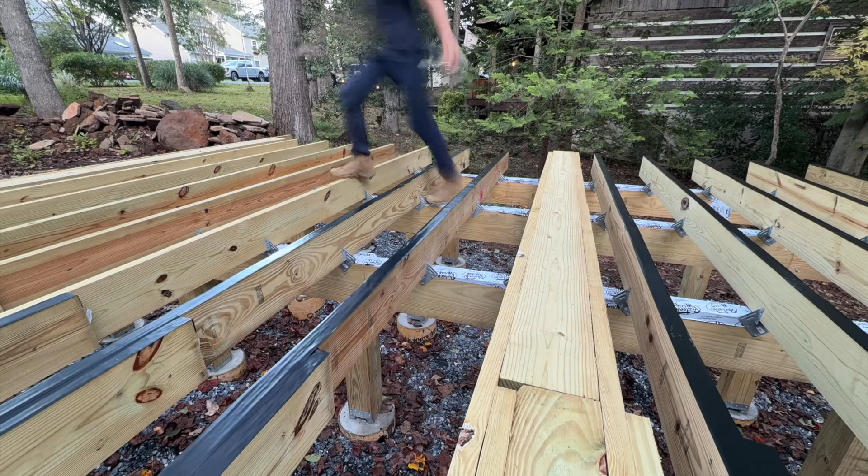Basically, this joist tape from Protecto Wrap is going to prevent water from ponding and potentially rotting the board at the top of the joist. So overall, this should extend the lifetime, and it's become common practice for the tops of joists in recent years.